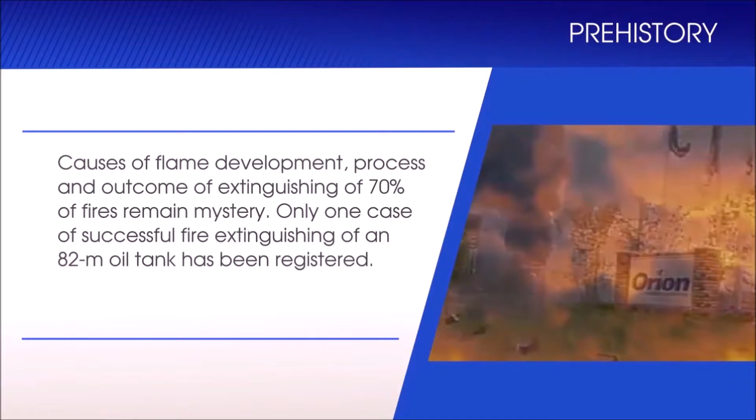The causes of flame development, process and outcome of extinguishing of 70% of fires remain a mystery.

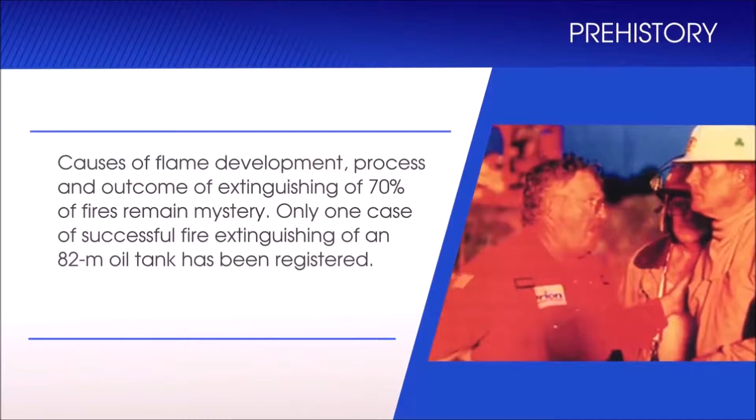Only one case of successful fire extinguishing of an 82-meter oil tank has been registered. The tank was extinguished in the United States at the Orion Oil Storage Facility using non-standard, extra-powerful equipment that had been delivered from another region specially for this purpose.

Not a single case of an oil tank fire extinguished successfully with the help of fixed or semi-fixed firefighting equipment has been registered anywhere in the world so far.

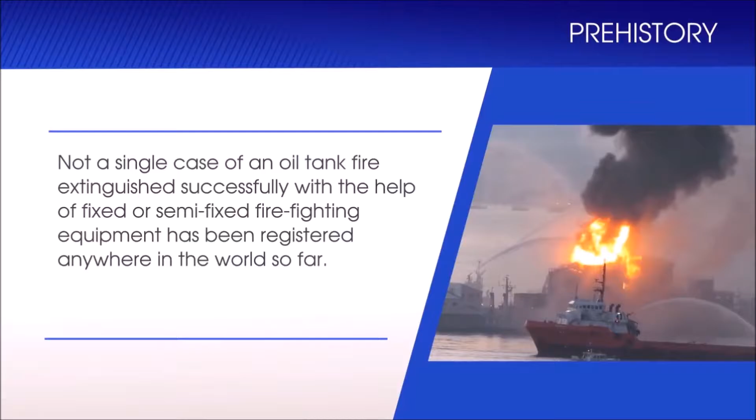These incidents show that in any country in the world, regardless of economic strength, fixed fire extinguishing systems installed on storage tanks in hydrocarbon processing facilities and factories cannot provide the solutions they were built for: first response to a fire and extinguishing it in its initial stages.

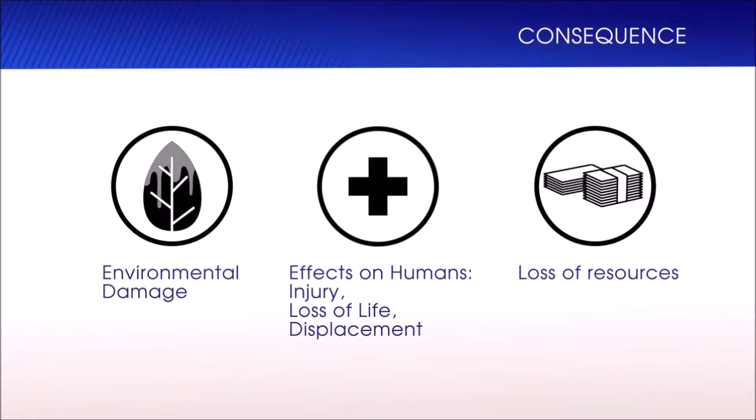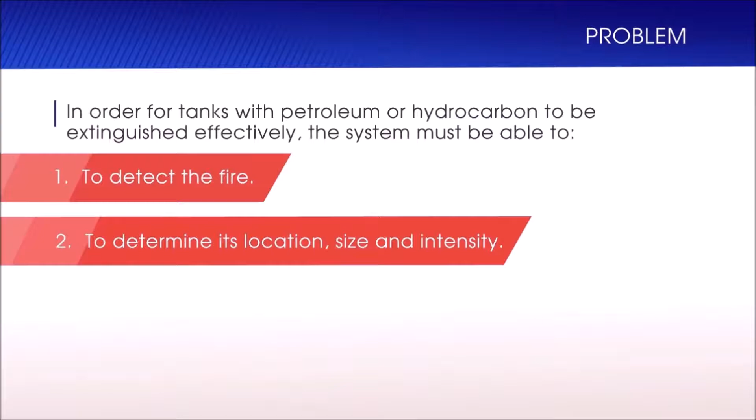In order for tanks with petroleum or hydrocarbons to be extinguished effectively, the system must be able to: 1. Detect the fire. 2. Determine its location, size, and intensity. 3. Turn itself on and deliver the foam directly to the source of the fire.

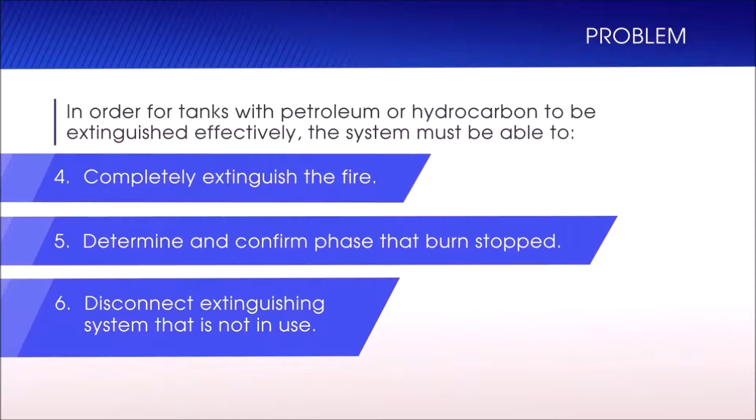4. Completely extinguish the fire. 5. Determine and confirm that the burning has stopped. 6. Disconnect extinguishing systems that are not in use.

These 6 points are guaranteed to successfully extinguish any fire for any tank size with any amount of fuel. The main challenge is the time from the moment of ignition until step 6, which must not exceed 3 minutes. Currently, available systems cannot reach the 4th stage in less than 12 hours.

We present the Impulse Storm IS fixed firefighting system, which can reach all 6 stages and completely extinguish any fire in less than 60 seconds.

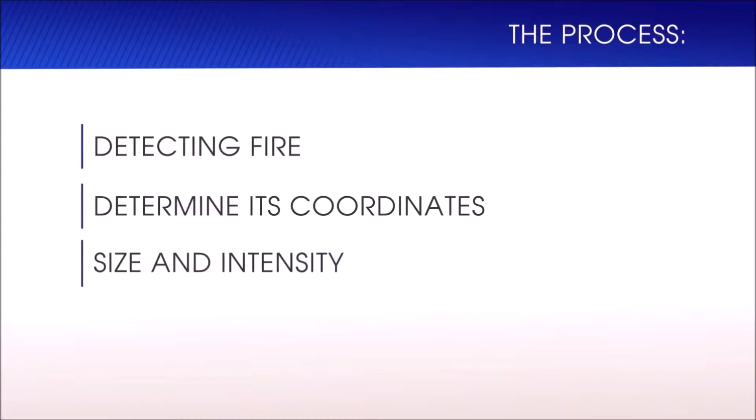The process: detecting the fire, determining its coordinates, size, and intensity. Example: a cluster of oil tanks of varying sizes. Monitoring the facility from a single point is impossible.

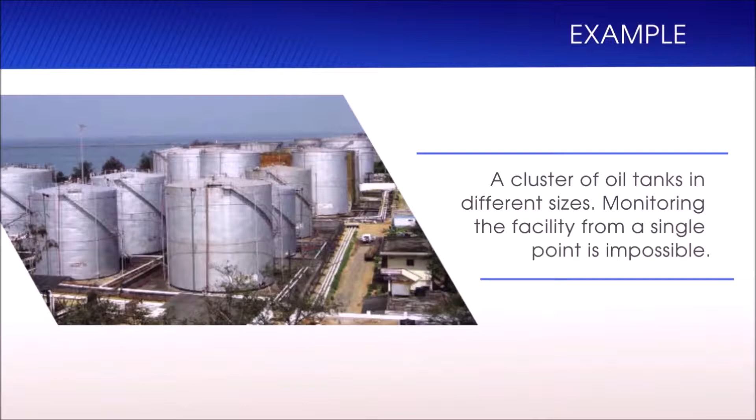Solution 1: Installing an array of infrared cameras across the entire facility. Problems: complicated installation, major setup and maintenance costs.

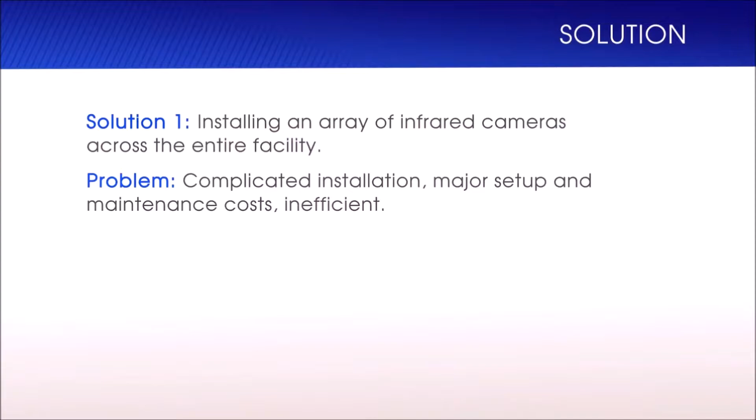Inefficient. Our solution: a new monitoring system combining 1 or 2 infrared cameras, software algorithms, and a set of mirrors, providing an independent scan of each tank and a visual outlook of the entire facility.

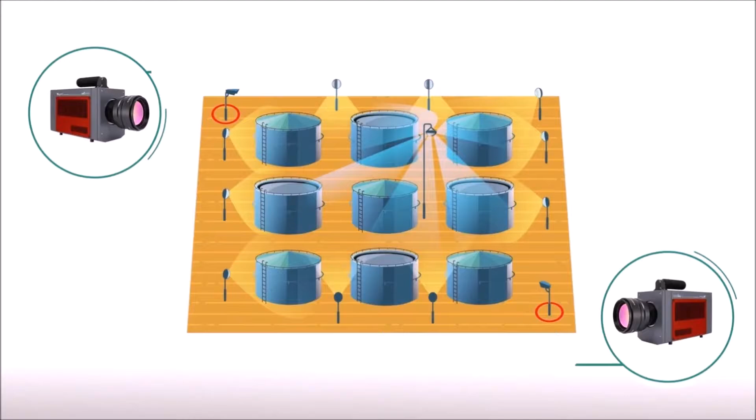Our software analyzes information in real time and can determine the location, size, and intensity of the fire in less than 2 seconds from the moment of ignition.

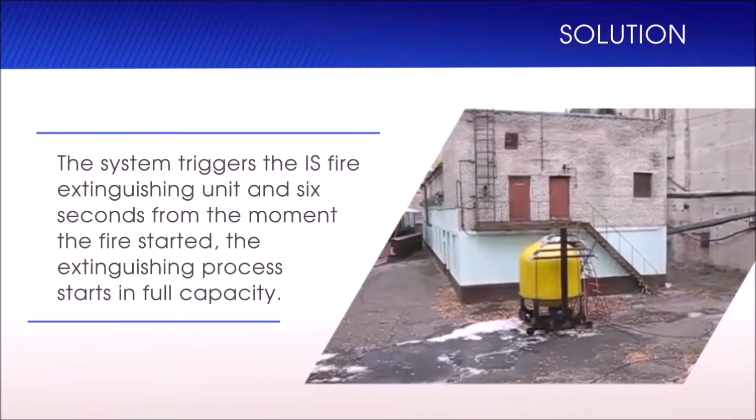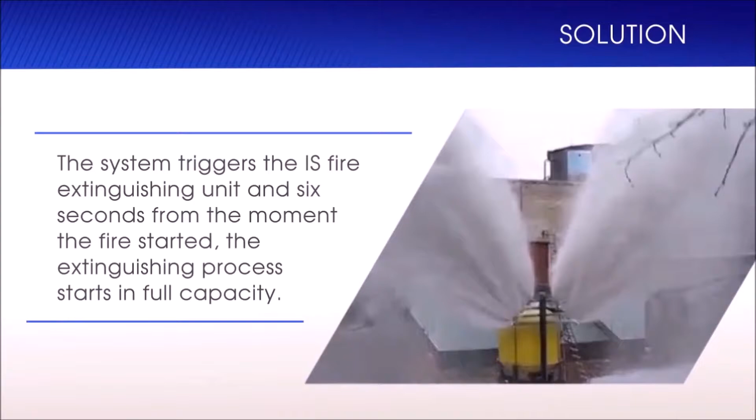The system triggers the IS fire extinguishing unit and, 6 seconds from the moment the fire started, the extinguishing process starts in full capacity. IS creates super-compressed foam bubbles using very high pressure and neutral gas.

The foam expands from the moment it leaves the IS container, goes through pipes at very high speed and reaches the top of the tank, where it maintains its speed as it comes out through the nozzle, covering the burning surface.

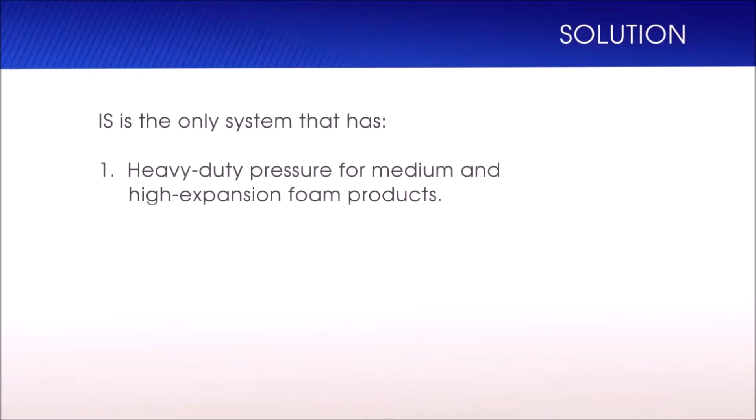IS is the only system that has: 1. Heavy-duty pressure for medium and high expansion foam products. 2. No oxygen in the foam mixture. 3. Foam created with a neutral gas and containing aerosol particles.

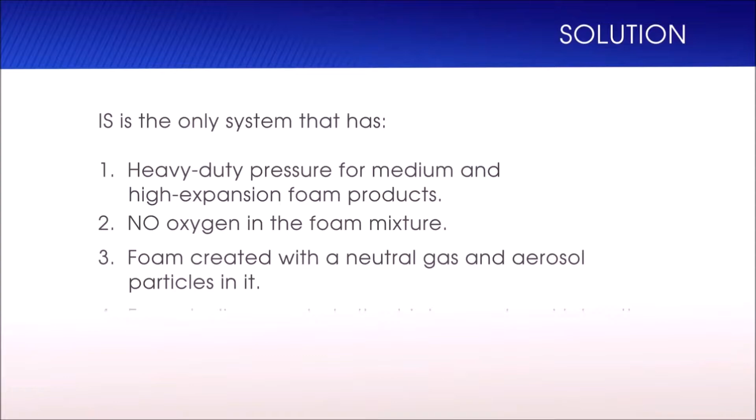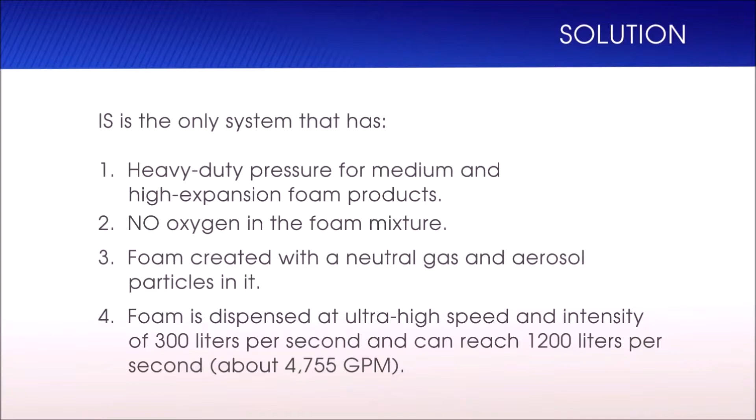4. Foam dispensed at ultra-high speed and intensity of 300 liters per second and can reach 1,200 liters per second, about 4,755 gallons per minute.

These unique characteristics increase the extinguishing effect by 10 times compared to normal systems. This makes the IS the only system in the world capable of extinguishing a 20,000-ton oil tank fire in 27 seconds.

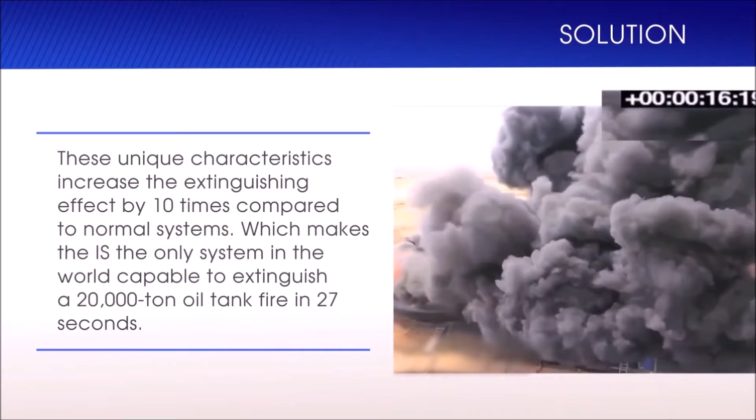Comparing IS with any other system in the market is impossible, because there is no other system that can extinguish a 20,000-ton tank fire by itself.

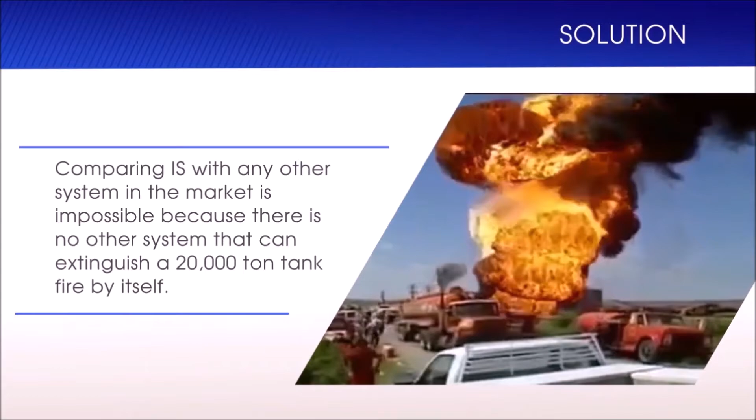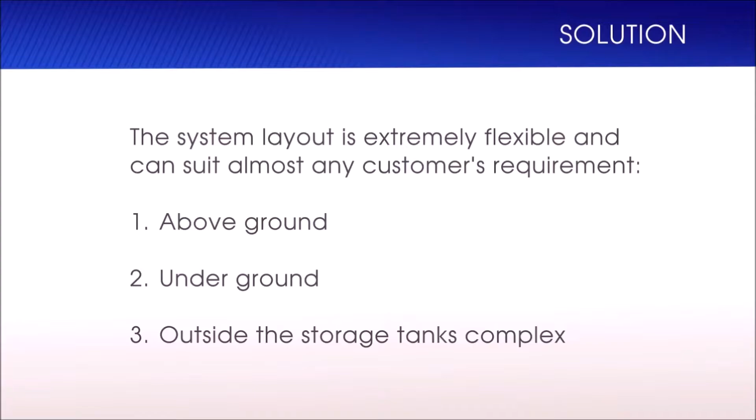The system layout is extremely flexible and can suit almost any customer's requirements: 1. Above ground. 2. Underground. 3. Outside the storage tank complex.

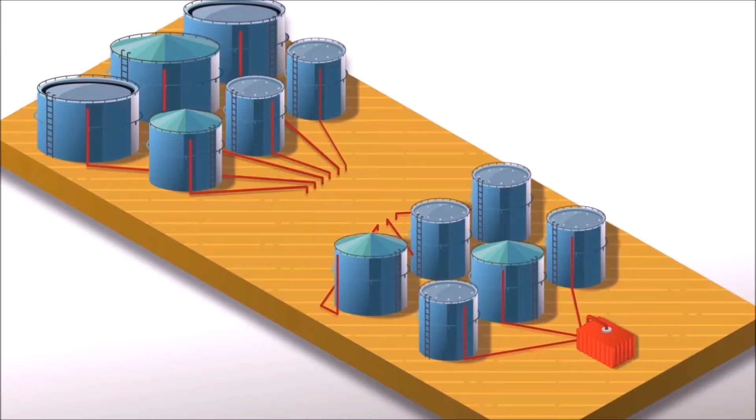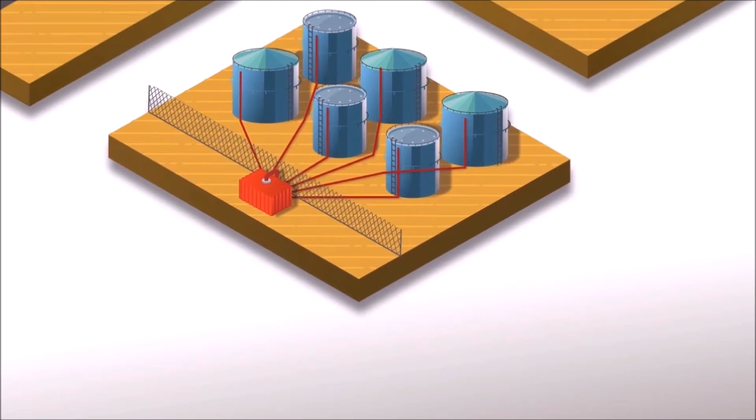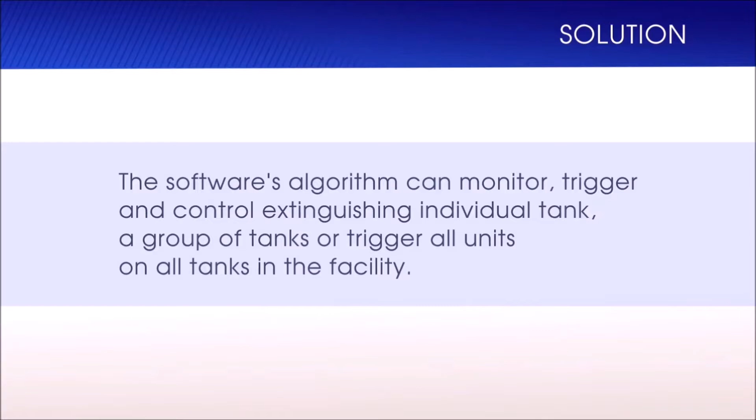The software's algorithm can monitor, trigger, and control the extinguishing of an individual tank, a group of tanks, or trigger all units on all tanks in the facility.

The system will operate at maximum capacity in any layout configuration. A mobile unit which can be deployed and connected to the burning tank's extinguishing pipes is also available on demand.

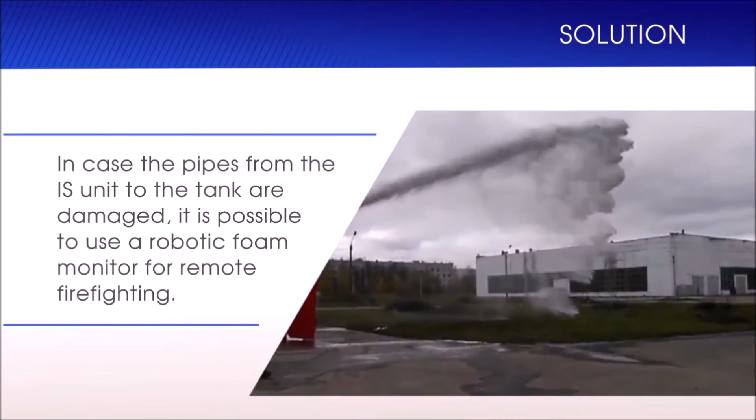In case the pipes from the IS unit to the tank are damaged, it is possible to use a robotic foam monitor for remote firefighting.